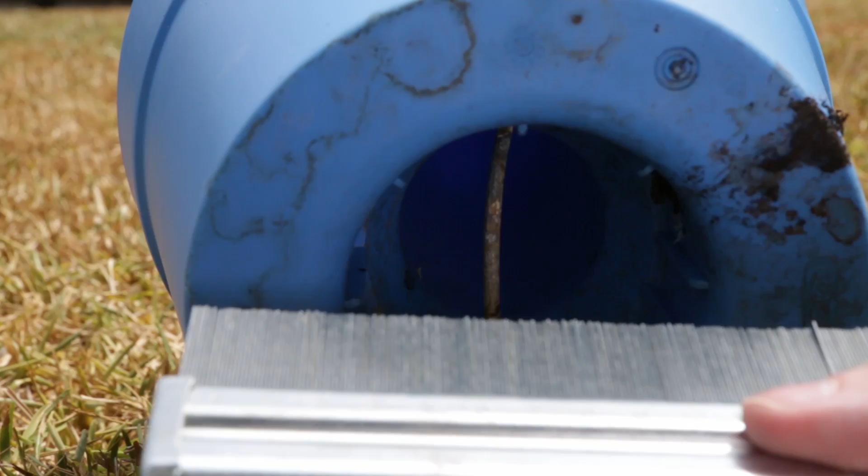So let's see what we can do to fix this and make something in Fusion 360 and print it out on the 3D printer. What I've got is a profile device that will conform to the shape when you push against it, and these pins will move and give you the contour.

Okay, so now we've got the profile of the shape that I want to make in the 3D printer. The idea is that I'll make a ring that fits inside here and the edges will come out, and that'll direct the water down rather than looping around the curved surface here.

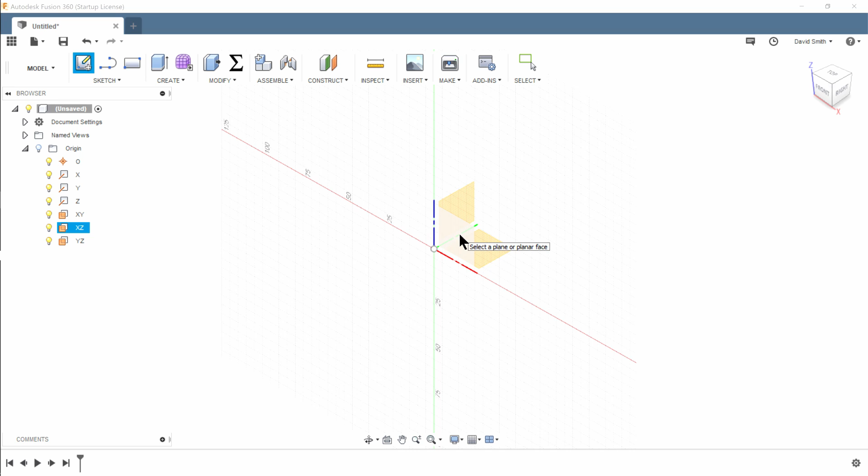The first thing we're going to do is create a sketch in the XZ plane, and that's because we want to rotate it around the Z axis, and because the printer's set up with an XY plane being the base.

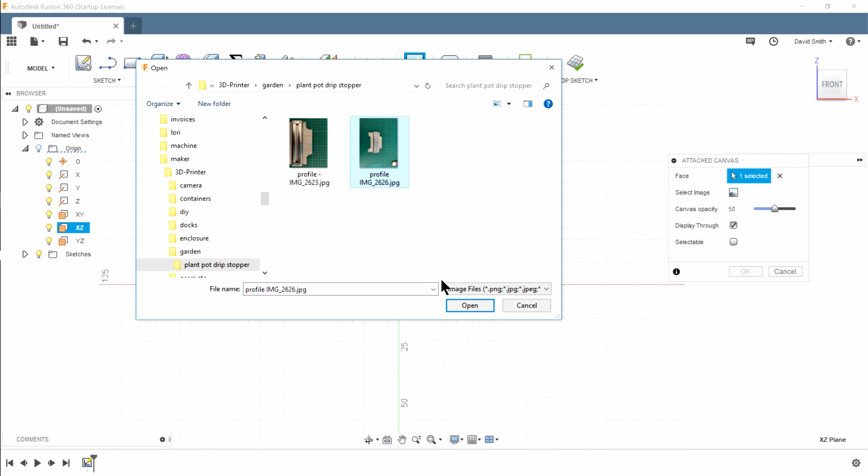The next thing we want to do is to insert the profile diagram that we took. So we're just selecting the face there, and now we'll select the image. Let's just zoom in a little bit there. And then we'll just say OK on that.

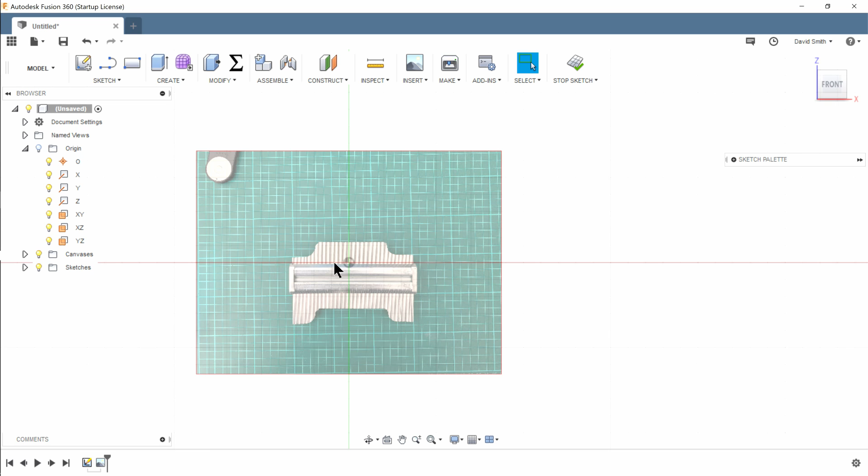So the first thing we want to do is calibrate this so that the size on here in the image is the same as the size on the sketch that we're using. So we just go into the canvases and we select calibrate. I'm just going to zoom in a little bit.

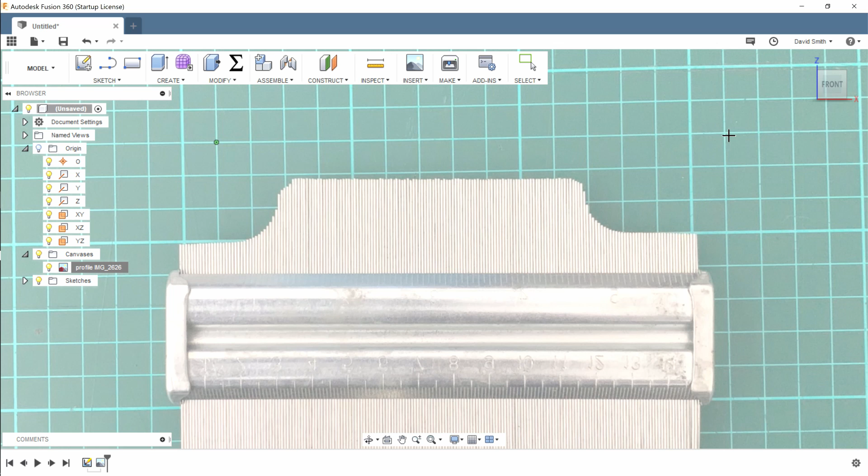What we're going to do here is select some known sizes. So we're going to go from there: 1, 2, 13, 14, 15. And we'll say that's 150 millimeters. Okay, and then we'll just zoom out.

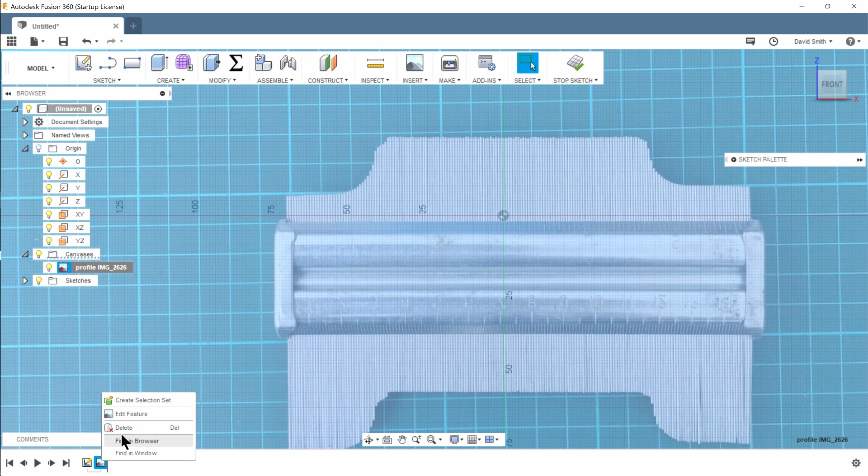So now the scale of the profile there is the same as the scale in the model. The next thing we want to do is just get this rotated so that the base of the profile here, that's at the bottom of the pot, is going to be horizontal in the model.

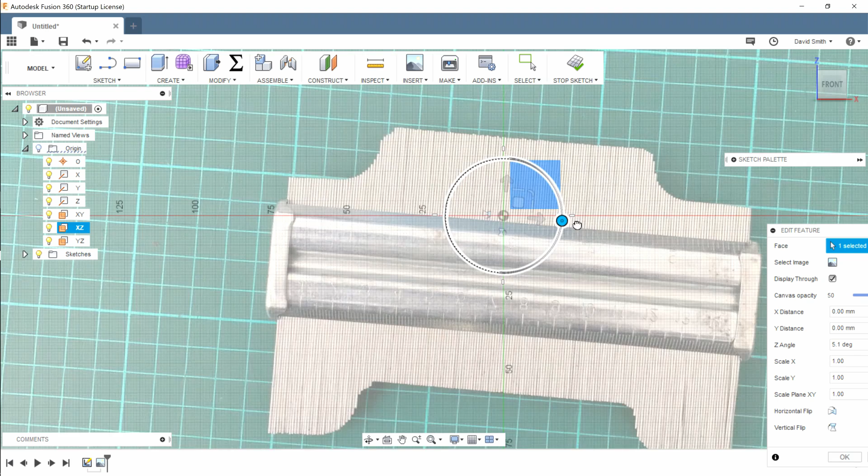So, 1.2. Okay, so I'd say that looks pretty horizontal along those edges here, which was the base of the pot. Let's click OK on that.

So now we want to get this centered. The other thing I did was I measured the base of the pot, and I want the piece of plastic that we're going to make to fit up inside so that when I put the pot down on the ground, it's not going to be sitting on the 3D printed part. So we're going to draw a line.

Doesn't really matter where it is. And we're going to make that 10.2.

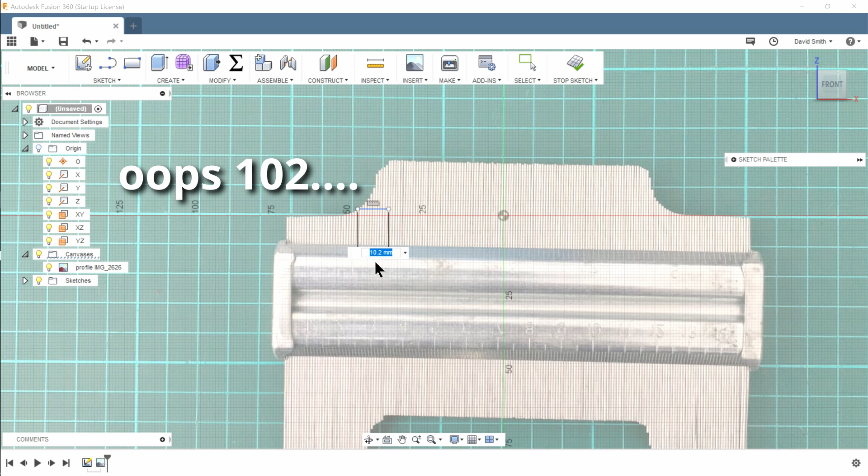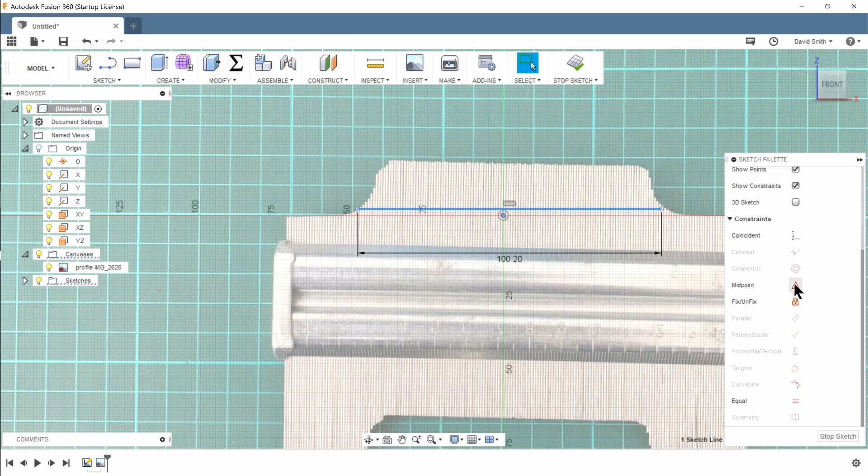100.2, because it's in millimeters. We want to center this line, so we'll select the line and the origin here, and midpoint. So now that line is centered here.

So let's move this diagram, or the profile rather. So it's about centered over. So just click on OK.

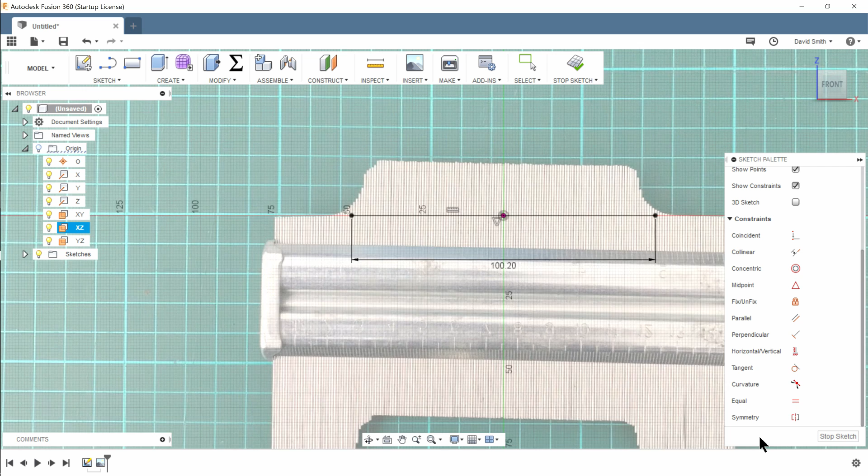So now what we want to do is create an arc. I'm going to do a 3-point arc, so I'm going to do the end of the arc there. Let's choose this point here, and then we choose one point on the arc.

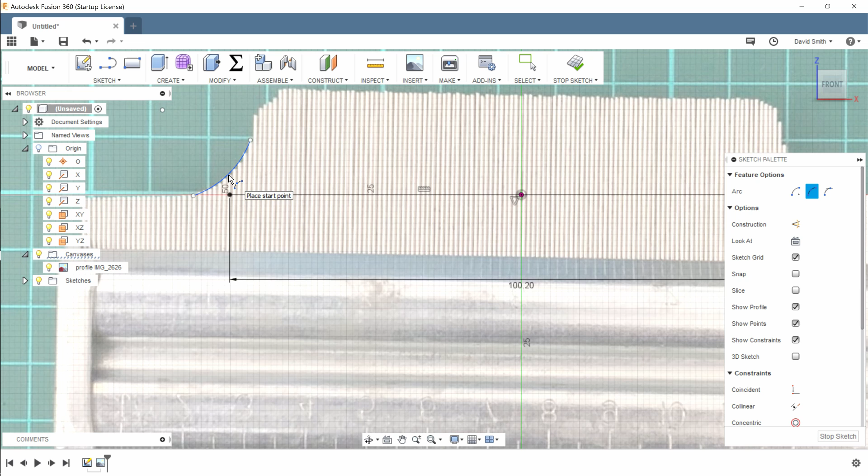That looks good. So the next thing we want to do is draw a line. L for line, and here. So let's go, first I'm going to click down by 5. So now we've created a profile that's got the rough curve of the base of the pot.

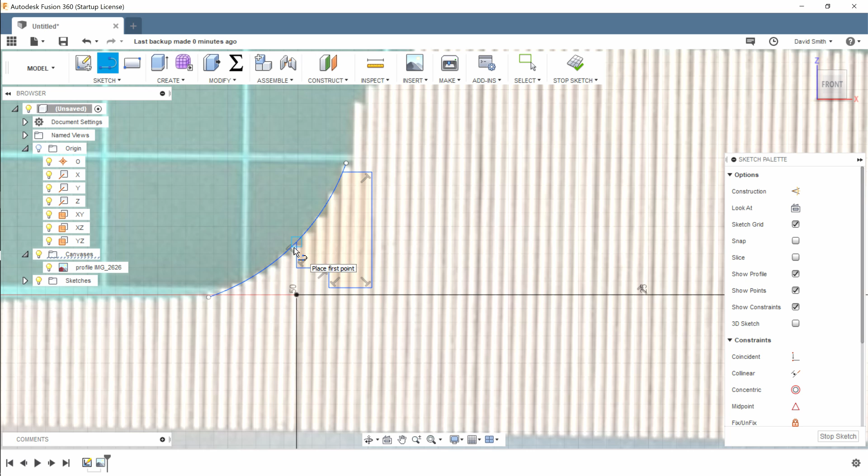Next what I want to do is create a body for this. Let's stop that sketch, and we'll select that profile, and let's create a revolve.

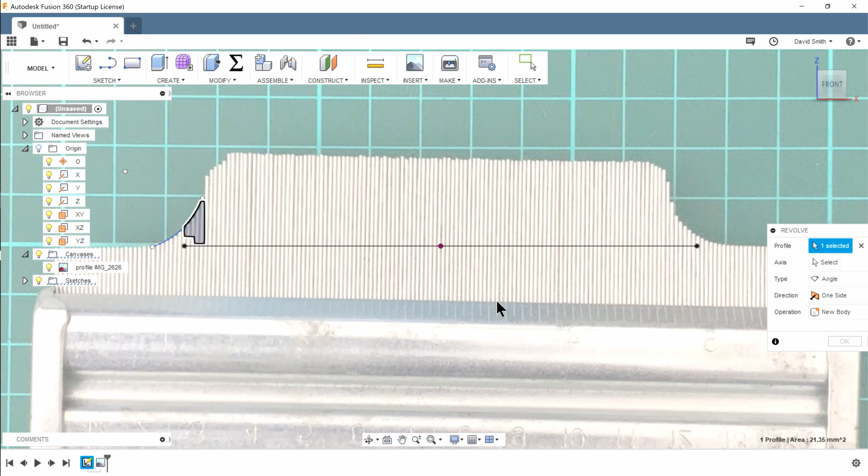So the profile we're going to revolve is that profile. The axis we're going to select is the Z axis, and we're going to go 360 degrees. So let's have a look to see what that looks like.

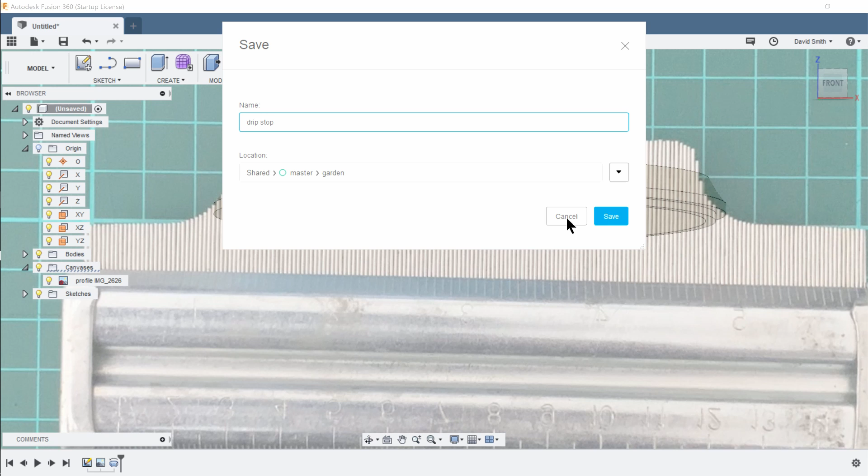So let's save that one, just call it drip stop. And then let's select make a 3D print, and we'll just select the body that we've just done, and we want to send it to the 3D print utility.

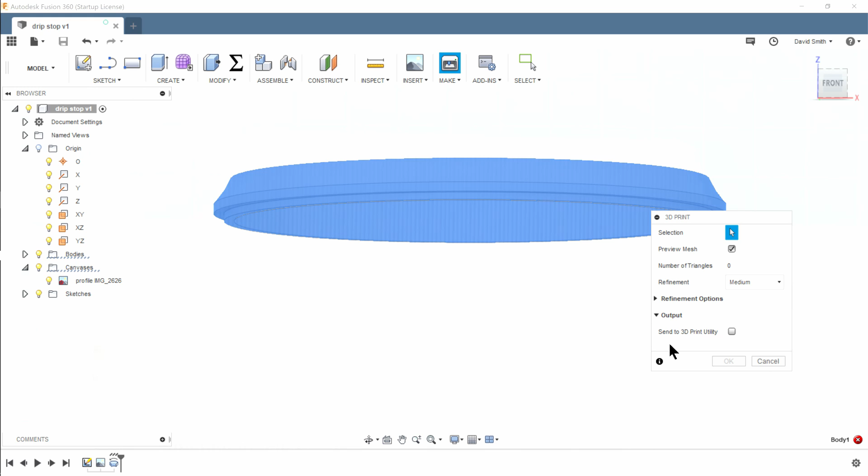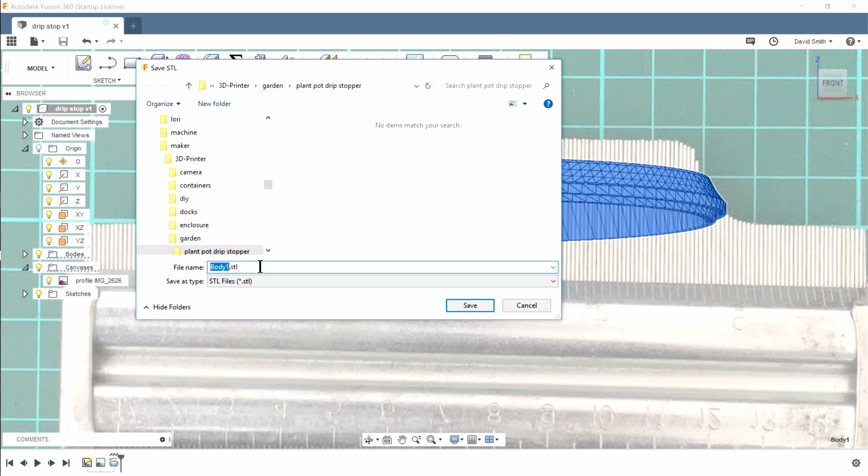I want to save a copy of that on my hard drive. Click OK. So let's call that drip stop.

And next we want to go into our slicer program. So next what we want to do is to add the model. The model is the STL file that we exported from Fusion 360.

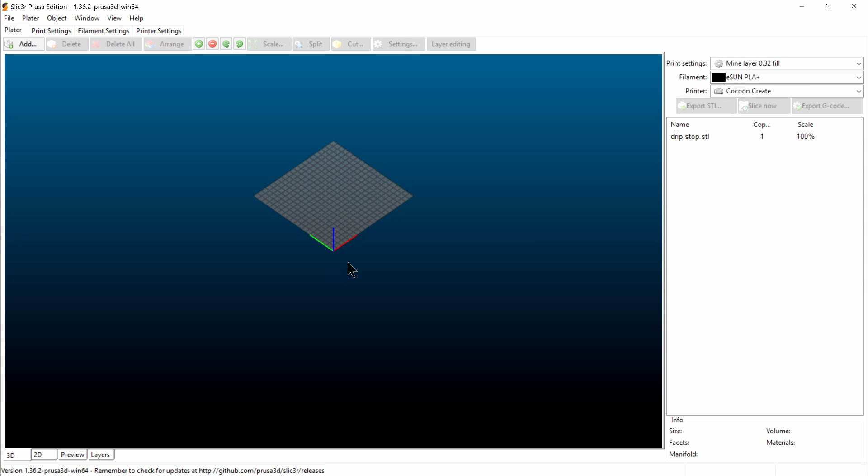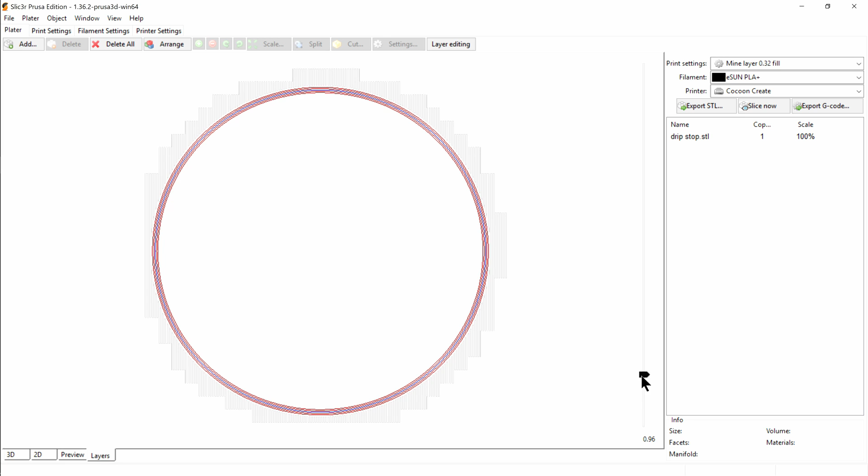So click slice, and what this is going to do is create the different layers. As you go up through the model, so these lines here are the model. And you can see what it's doing there.

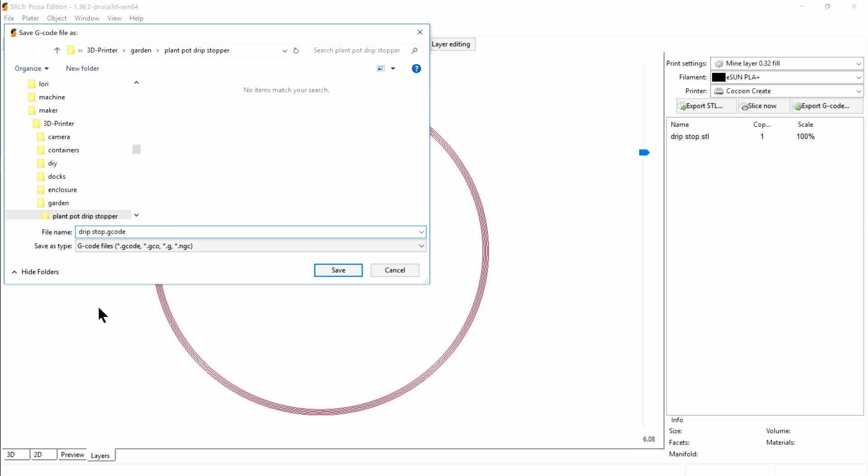Okay, so we'll export the G code. The G code is the information that the printer understands. Slicers understand the STL, and that's the model. This is the instructions for the printer for what to do for each layer height.

So let's copy that file, just paste that one in there. And then we'll take that over to the 3D printer.

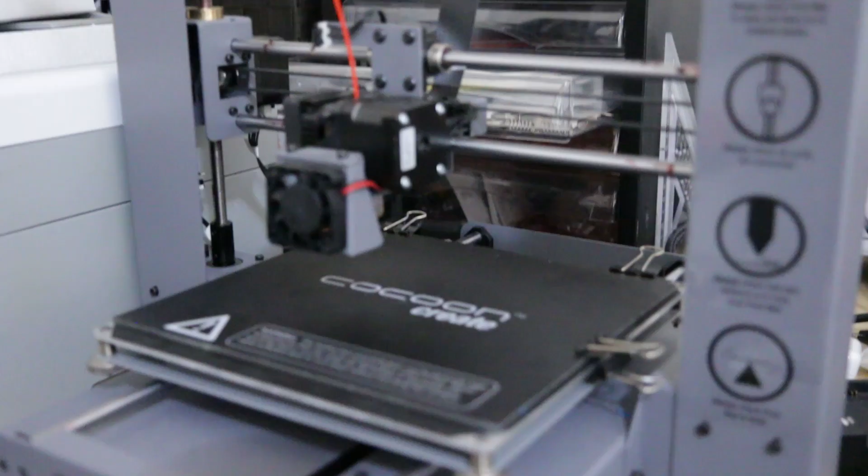This filament here, that gets fed down into this block here, so that has a heating block underneath. That gets melted and it just squeezes out the right amount of filament for each bit.

So the next thing is to take the SD card, put that in the printer, and let's turn on the printer. So let's take a look at that.

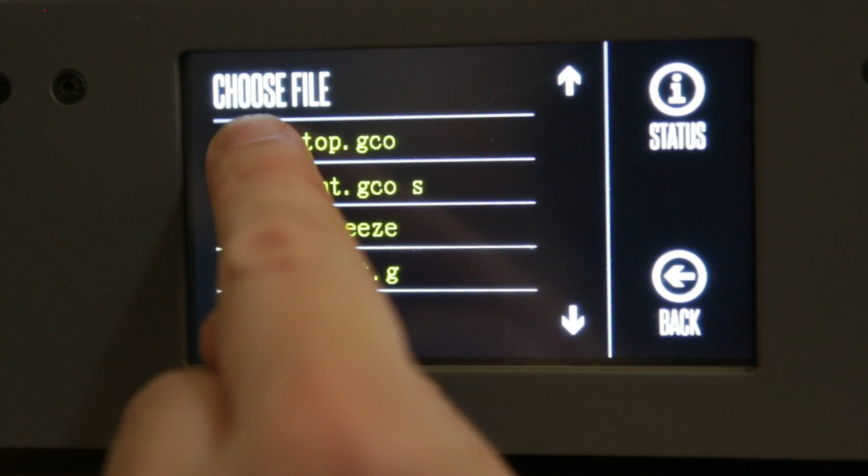Okay, so here we have the screen of the printer. So let's click on print and we'll select the drip stop. And that starts setting up the printer now.

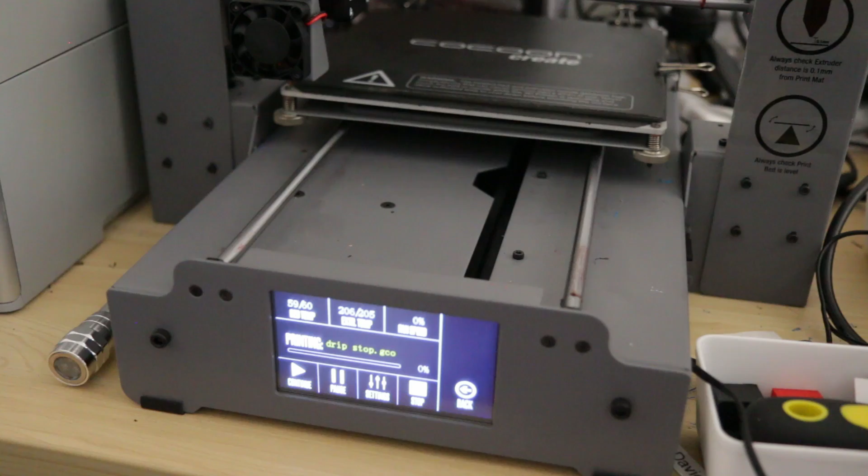So what you first see is the bed's going to start to heat up to 60 degrees and the extruder is going to heat up to 205 for the PLA. So that's now reached temperature, so it's going to start to do the first layer there.

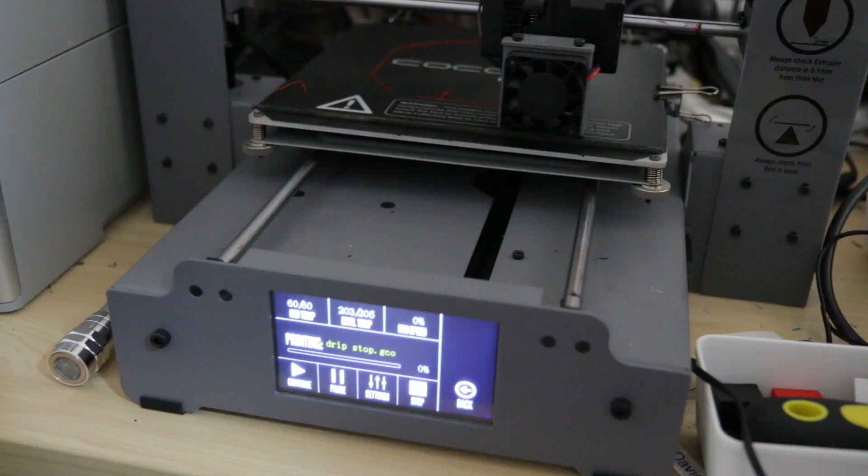So this first line it's putting out is just kind of like ejecting a little bit of filament. It's not actually part of the print. I've got it set up so it's going to do 2 of those going around. Okay, so now it's starting to do the first layer of the print.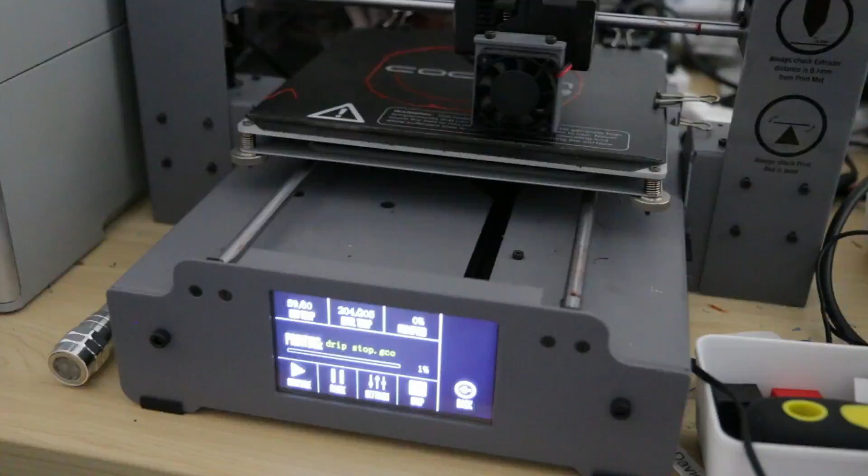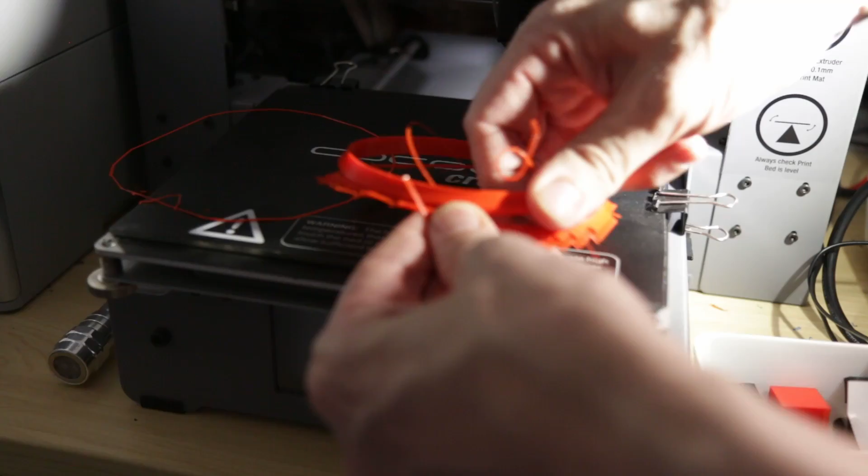Okay, so the next part is to try and just tear off the support material all the way around. And we're left with the part. Okay, so let's see how this fits.

So I just need to glue that into place. Hopefully we've got a line all the way around there. Okay, now I'll get something to weight that down and then we'll come back and see what that looks like.

Okay, the moment of truth. Let's put some water into this blue pot and see how it transfers down below. So there we go, working as expected. That's really good, so that will stop the water spilling over the sides of the pots.